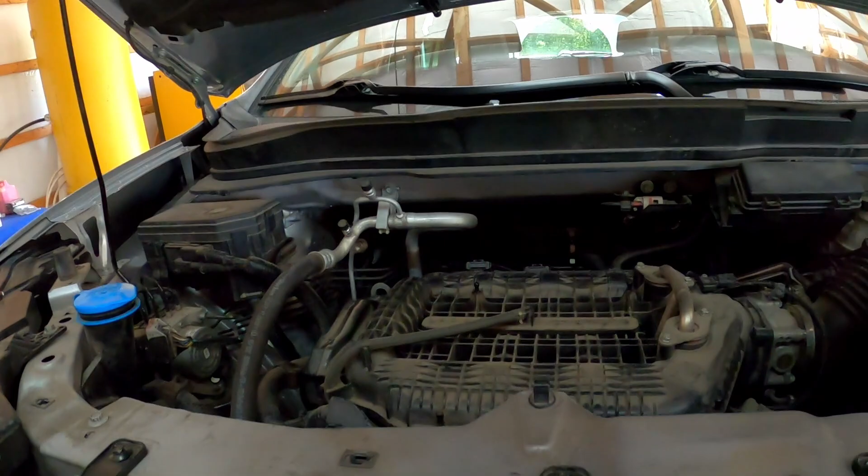All right, so we're diving into the timing belt and water pump on this 2016 Honda Pilot. So first thing first, I went ahead and I removed the cover from the top of the engine. I removed this front cover right here because I wanted to have access to this radiator cap. And I'll also be removing the underbody panel.

So this is an inspection plate and I need to get these lined up. There's one on both banks since this is a V6. I need to get both lined up to top dead center. So I'll rotate the crankshaft and make sure that my marks are lined up to top dead center.

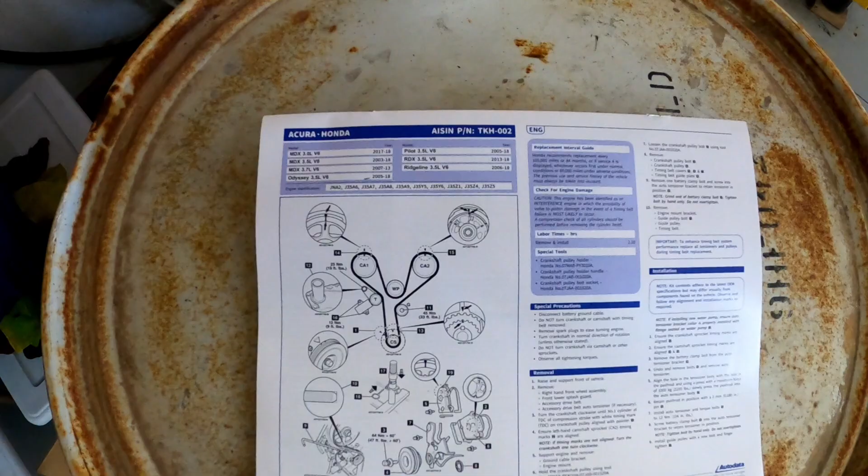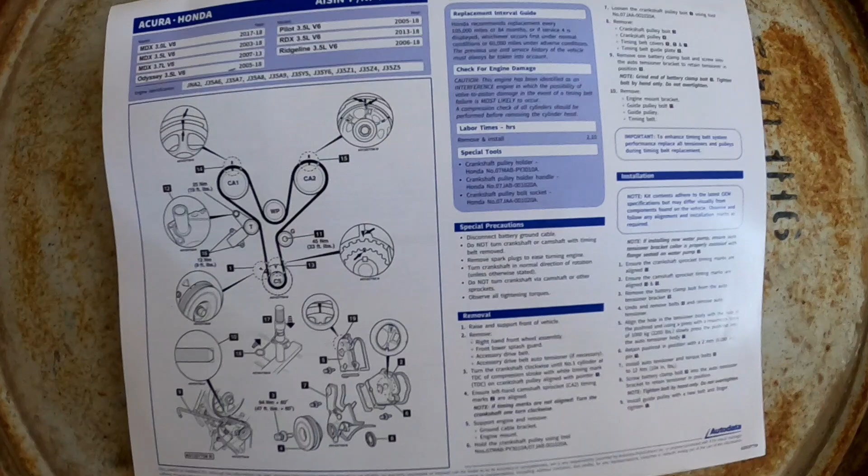So if anyone's wondering how I'm getting all of this done, this is a pretty good explanation that came with this Aisin kit. Now, looking here, you can actually see these timing marks a little bit better than I could show on camera, but there's just a couple of dashed lines on the cam gears that indicate top dead center. You just want to make sure that both of those are lined up. This has been a very handy set of instructions if you're someone doing this on your own. The fact that this kit has these is very nice. It's all pretty straightforward and pretty well labeled.

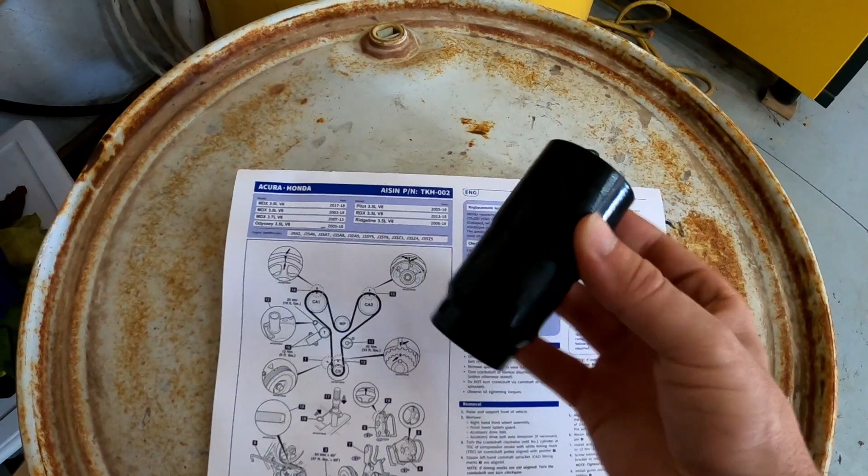The other thing I want to mention, this is a Mophie brand socket. I got it off of Amazon. It's a 19mm with some extra thick walls. You will definitely need something like this to get that crank pulley off. A standard socket won't do it. You need something with these extra thick walls, and I got it for about $15 on Amazon.

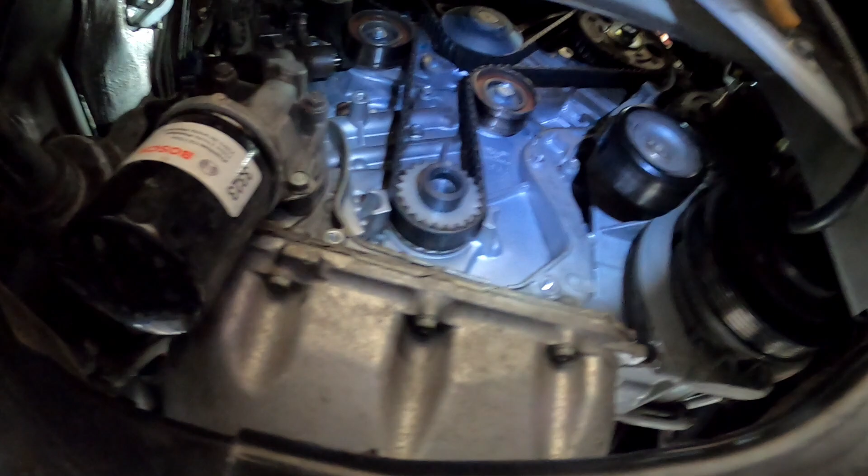All right, so I've got my crank set to top dead center on cylinder 1. Now I'll go ahead and drain the coolant since we are doing a water pump replacement, and I'm going to work on getting this front pulley off. All right, taking a look up here, we can see that I've got my front crank pulley off. I've got my timing belt covers off as well.

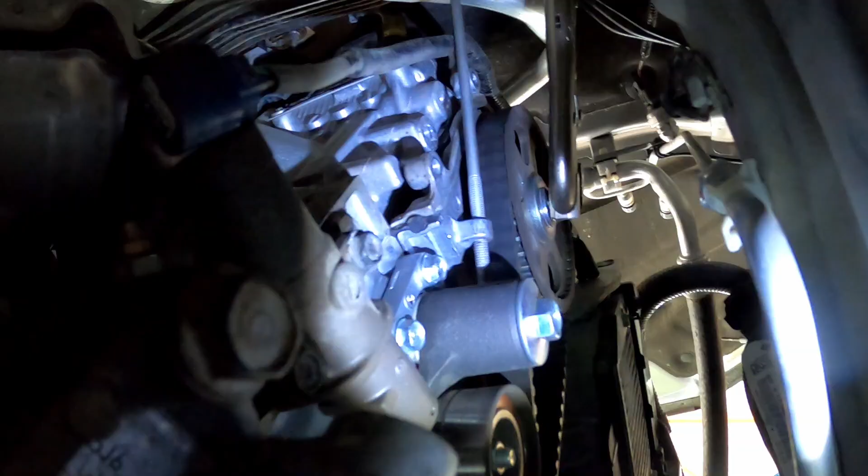Next, what I'm getting ready to do is remove this guide pulley bolt. You can see that there's a long bolt or a long stud threaded into that auto tensioner. That's one of the battery hold down studs, and you thread it in through that auto tensioner, and that maintains the tension. So next what I'll do, I'll remove that guide pulley.

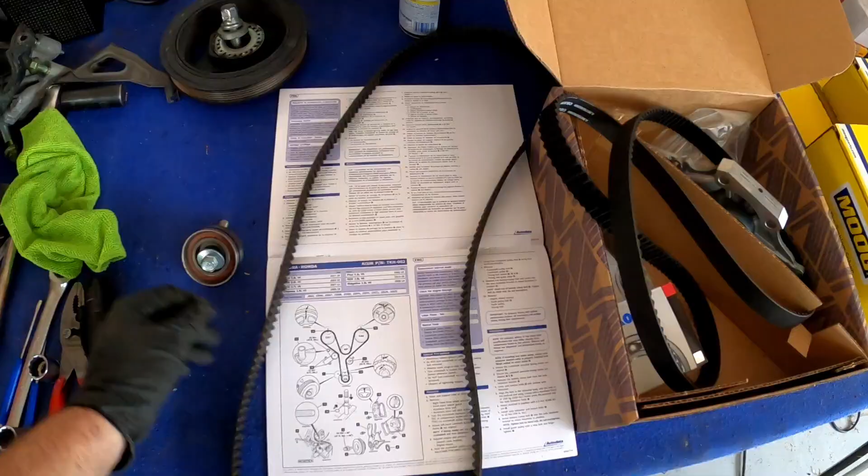I've got my engine set to top dead center. I do expect my camshafts to jump a little bit when I get this undone, but we'll be able to line it back up when we get the new one on, and I will also be doing a water pump while we're in here. So let's continue on. So I have my old timing guide pulley removed, and that allowed me to go ahead and remove the original timing belt. You can see in our new kit, we've got a water pump, a tensioner, a couple of pulleys, and a new belt, of course.

Hi, folks. So now that I've got all that removed, I will work on removing my auto tensioner assembly and the pulley, and I'll go ahead and get my water pump off.

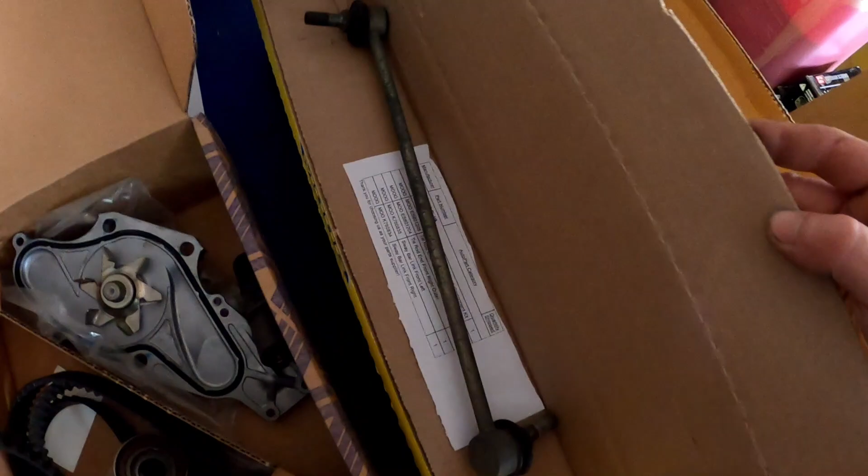All right, so I've got my original water pump timing belt here, along with the pulleys and the tensioner. All of that's been replaced. I've also put on some new tie rod ends for them. There are the old ones, and some new sway bar links as well. Here's one of the old ones.

So coolant level has been topped off. Oil level looks good. So next thing we'll do is we'll give it a start and see how it sounds. So far so good. No check engine lights on, tire pressures look good. So 114,000 miles on this Honda Pilot with a new timing belt and water pump. That shouldn't need to be addressed for another 100,000 miles, so they should be good to go.

Now, as you can see, I was test driving it, which is why it's a little dirty and a little muddy, because it's been raining out here. So the customer's on their way to pick it up now. I just wanted to show you all a little bit of going into the job, getting it done. I know it was pretty quick. It wasn't exactly a how-to, but just kind of to show you all what goes on here. Not all of it gets filmed. Some of it gets edited out for different reasons, but I'm working on improving.